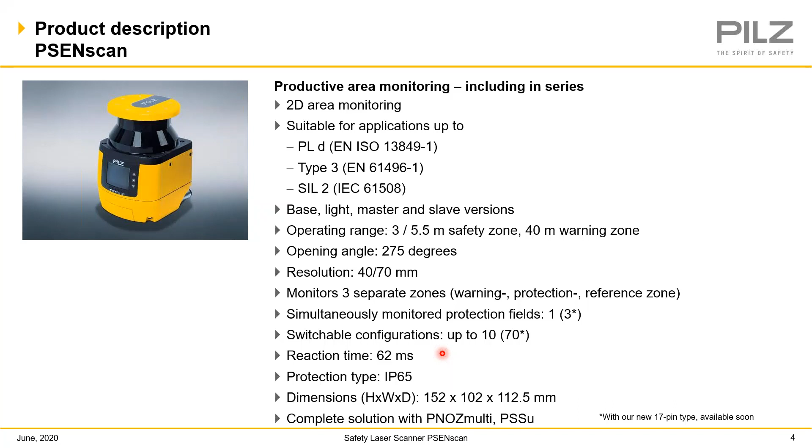Currently, we can do 10 different zone configurations with our scanners. But again, with the new version, you'll have up to 70 different zone configurations possible. The reaction time of the PSENscan is as low as 62 milliseconds, and it has an IP rating of 65 for your protection.

Some additional features with the PSENscan with the light version or the master-slave version are the muting capabilities, EDM, which is the external device monitoring. There is an override function. There's also the capability of doing reference point monitoring, and you can also use these scanners in vertical applications.

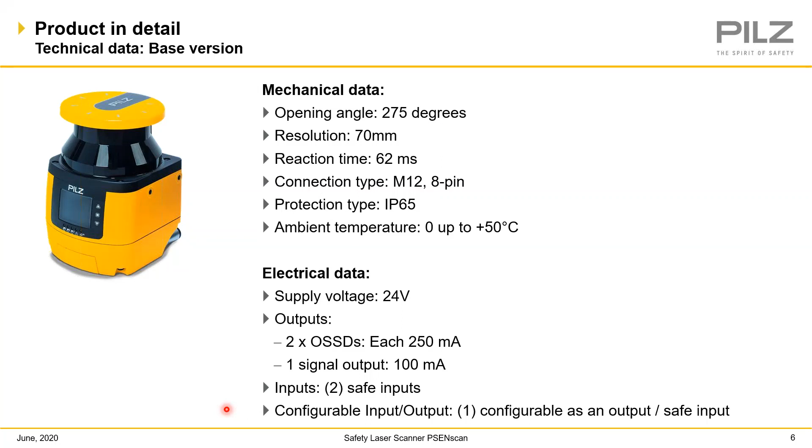They all come with a 12-pin or an 8-pin connection on the back side of them. You do not have to use both of them. It's just simply one or the other. And the only difference is it depends on how many inputs and outputs that you need for your configuration. So if you don't need very many, you can use a lower cost cabling and go with an 8-pin version. As you see in parentheses, with the new version coming out, it will be a 17-pin connection.

All of these, again, are 24 volts, and the inputs and outputs all depend on the number of cables that you have, depending on which pin configuration you choose. Each one of these scanners has a removable memory module. The memory module is used to save your configuration on your scanner.

If something happens to one of your scanners, happens to become damaged, you can simply take the bottom plate off of the scanner, unplug the memory module, and plug it into a new device. You do not even have to take the cabling off the memory module, because this is where your 8-pin or 12-pin connections will be. You do not have to remove the cabling. You do not have to have any sort of computer or software. So all you simply do is plug in the memory module, and when you start up, it does a self-test, and your scanner is good to go.

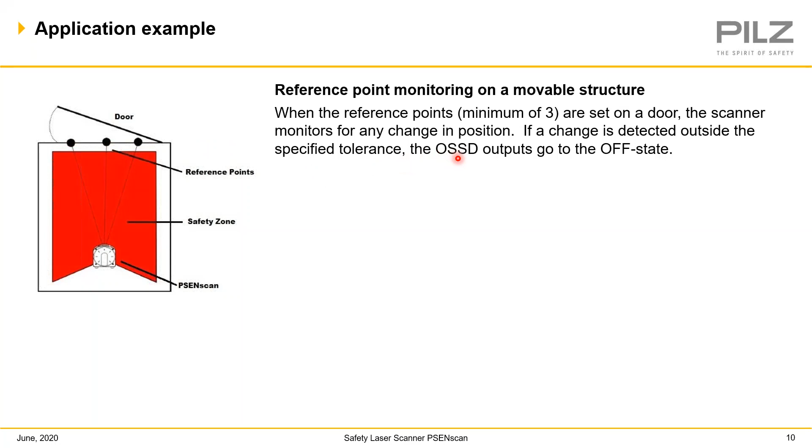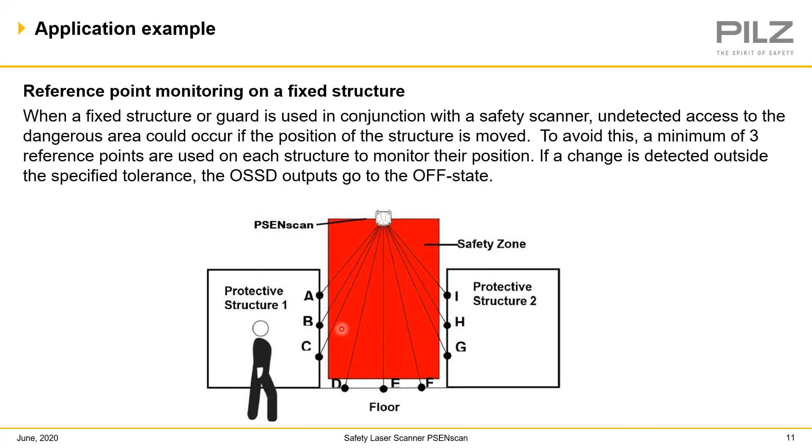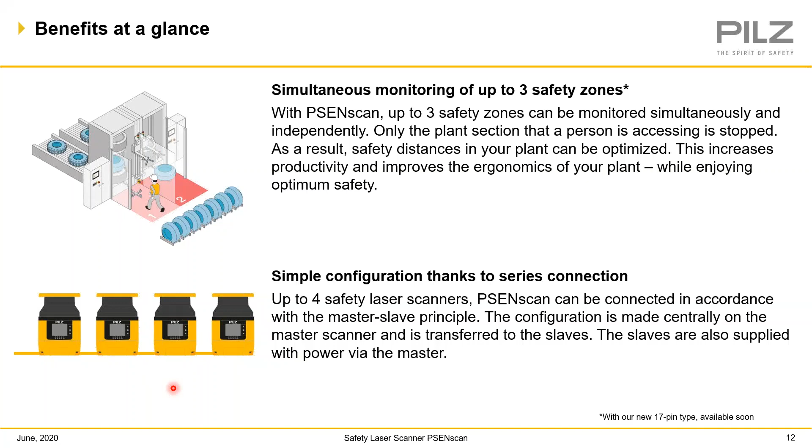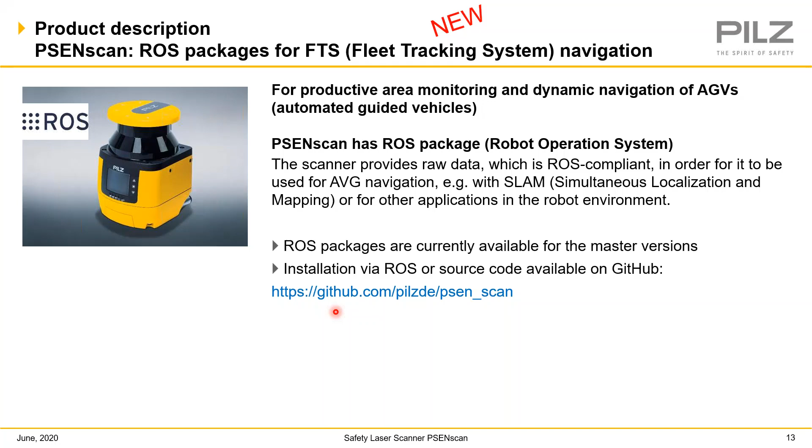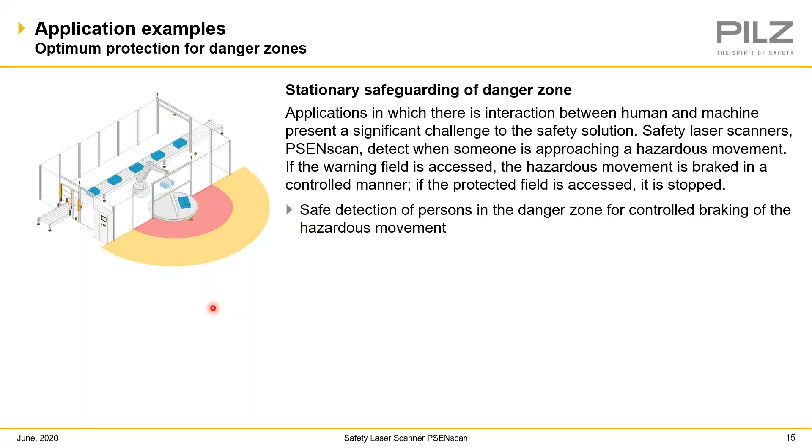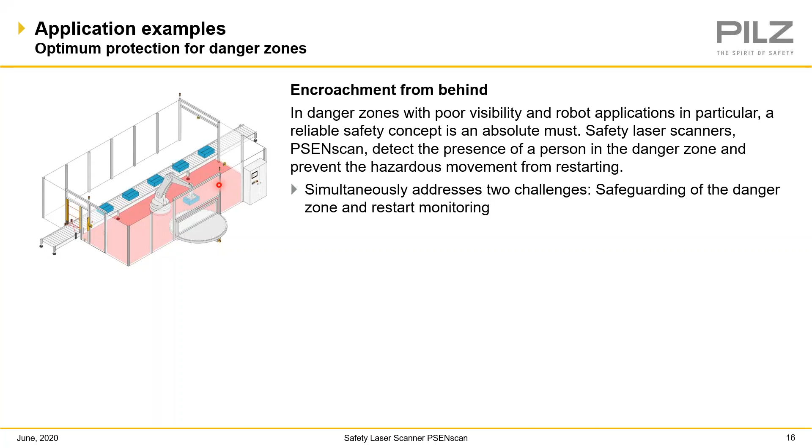This here is the exact same work cell. However, instead of monitoring the outside, they're showing you how you can monitor the inside. So this will be used if someone would happen to be inside the robotic cell, and maybe somebody would walk up from the outside, not notice the person inside the cell. They try to start the robot cell, and that could be very hazardous. With the laser scanners on the inside of the cell, that would protect you from restarting this machine because it would detect someone inside.

This is an example of using the laser scanner in a vertical application utilizing muting. As you see here, this is a walkway. One employee can walk through here, but also a conveyor belt for product to come through. The laser scanner is mounted in a vertical application, scanning this whole area, allowing access for the individual containers to come through, again, utilizing the muting function, but limiting the operator to go through. And if they do, again, you would shut down similar to what you would with a light curtain.

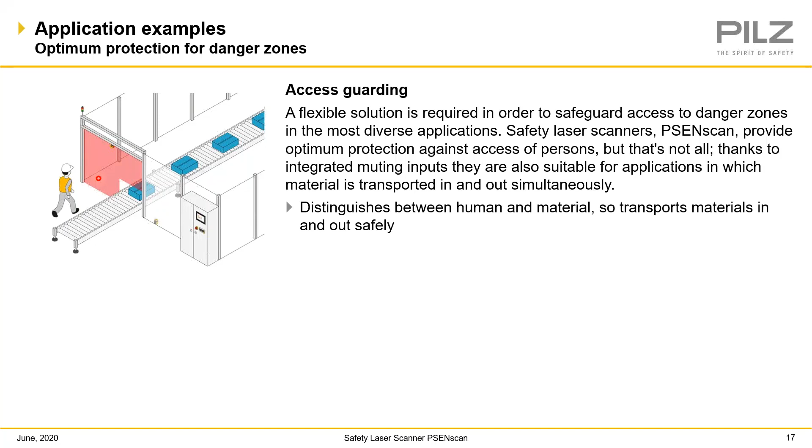We've talked about this already, but again, this is an application where you can use the laser scanners on an AGV, again, utilizing the ROS packaging. And again, you can use it with lots of different devices, lots of different applications. Again, here they're talking about using it with the SLAM algorithm. SLAM will help you with mapping your environment and being able to avoid any type of collision with your AGVs.

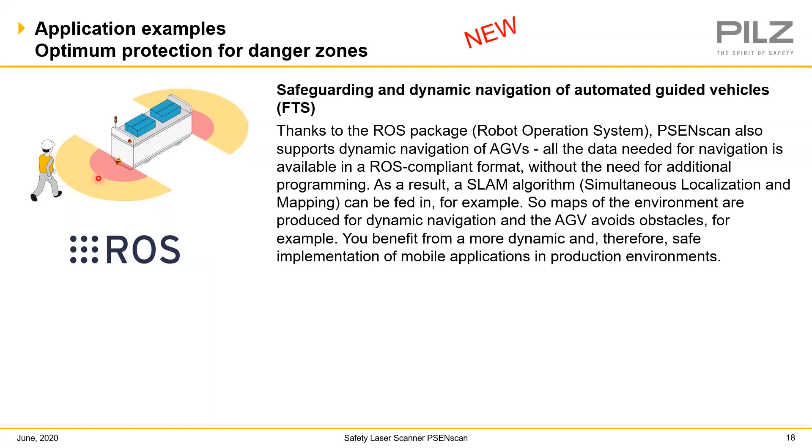These are just a few more AGV examples. With a Pilz safety scanner, you have 275 degrees of protection. So as you see in this AGV application, you're only using 2 safety scanners. So with a 275 degree protection, one safety scanner can do 2 sides, and the other one on the opposite corner can do the other 2 sides. Again, cutting down the cost of the number of scanners that you have to use for one application.

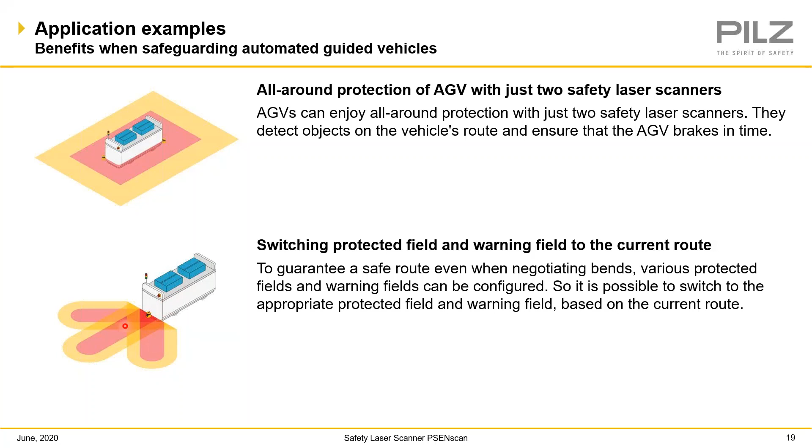This application here is utilizing the zone switching. So if the AGV is moving forward, you can have it set for zone 1. So maybe you're just looking straight forward. But if you happen to turn to the left or right, you can change your zone configuration to be at an angle so you can detect off to the side to make sure that there's not going to be any collision versus just checking the front.

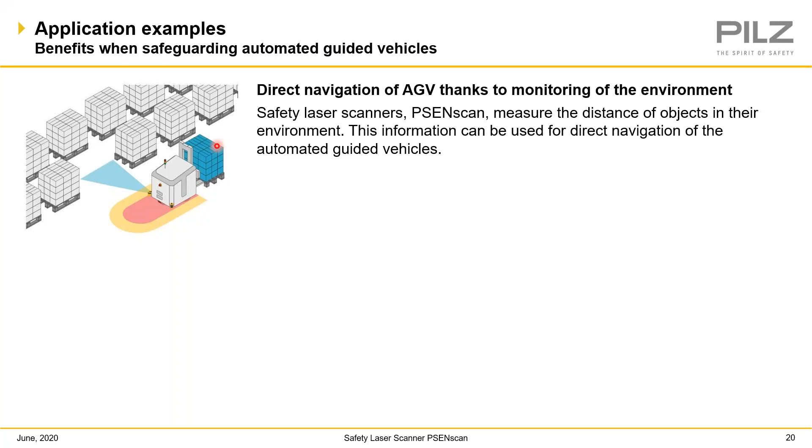And another AGV application here with the PSENscan: it does provide all the raw data, but you can also use that data for distance measuring. So here the PSENscan is actually going through and trying to find an open space to put this container. So utilizing the raw data from that scanner in your ROS environment, it's actually measuring the distance and finding an open spot and allowing you to use that for your cargo here.

This is just a simple breakdown of the part number configuration. As you can see, we have several different versions. The ME will be the new master encoder version, which will be the 17-pin version that will be coming out later this year.

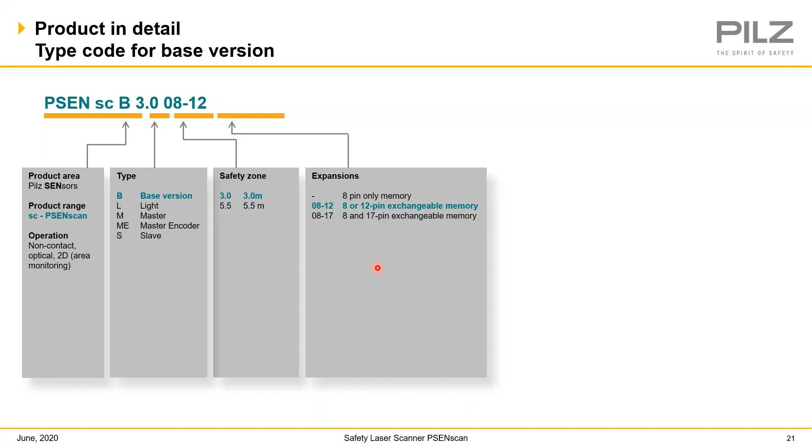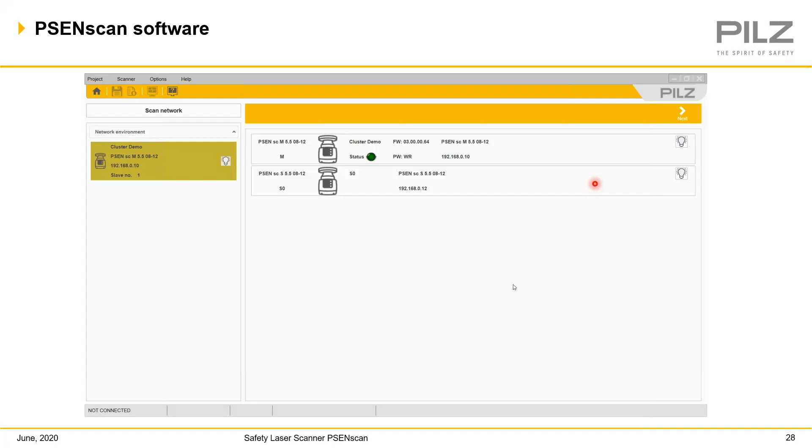Again, if you're back to the main screen and you want to create a brand new configuration, just simply click on that. That will open up a window that has all the available products to date. You do not have to have different software. The base version has a different software, but the master slave version and the light version all utilize this same software here. You can simply select which version you want, and that'll take you to the general properties.

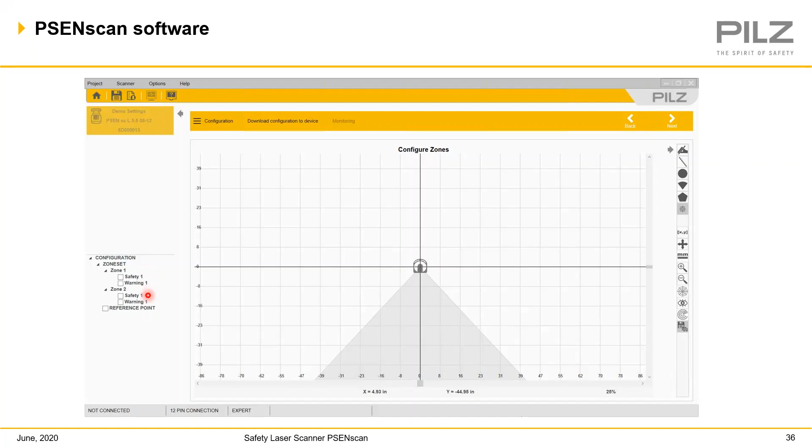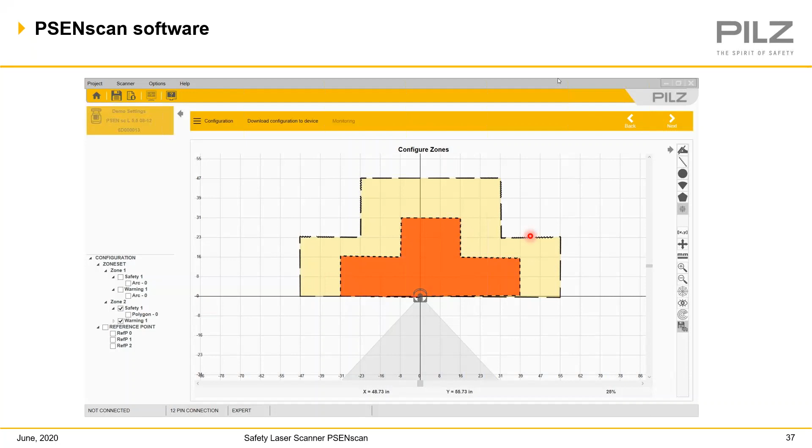Over here in the far left-hand side, you can see your configuration. So since I have chosen to do 2 zones, it allows me to have 2 zones here that I can draw in independently of each other. So here I selected zone 2. I can simply come in here and I can draw in my safety zone and my yellow warning zone. If I come over here and I switch to zone number 1, I can have a completely different configuration by looking at that zone. Again, I have a red safety zone and a yellow warning zone.

The final thing that you have here is your reference points, which I mentioned earlier. The reference points, you simply select your reference point indicator, and then you see the green dot located up here. That is your actual reference point of what you're using as a structure, the door or the wall, the fence. And with here, you can actually select the tolerance, and what is the tolerance of the vibration you're going to allow that to move before it trips.

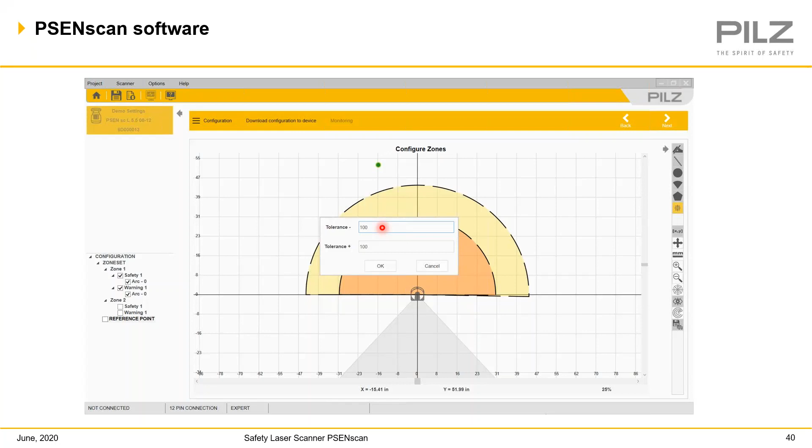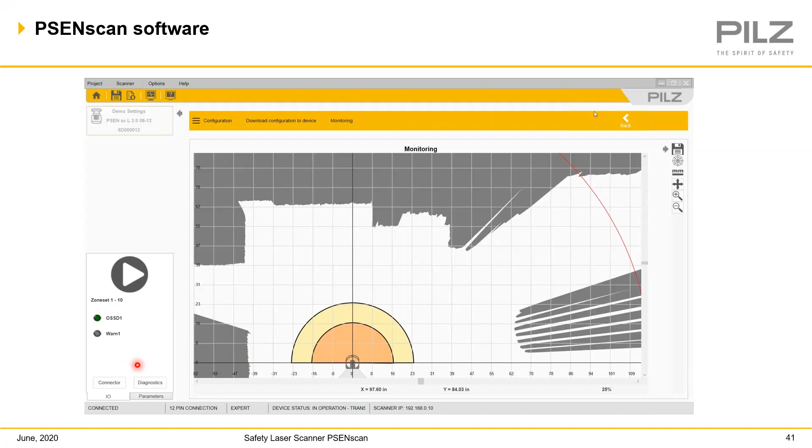Once you save your configuration and download it to your scanner, you're actually going to go into a live monitoring mode, as you see here. You have your simple scanner configuration down at the bottom, and anything that is gray is a wall or a structure. If I come down here to the bottom left, I can actually select my diagnostics indicator, and this window will pop up and now allows me to look at every single input and output I have on that scanner, and it also shows me the status. So whether area switch 1 is on, my OSSD outputs are on or off.

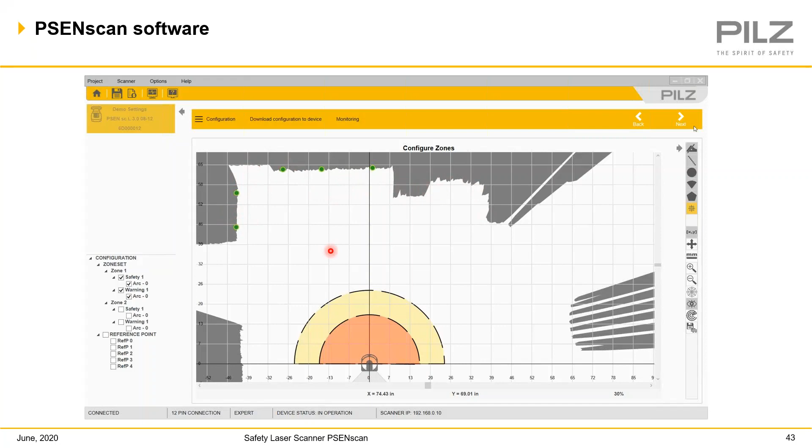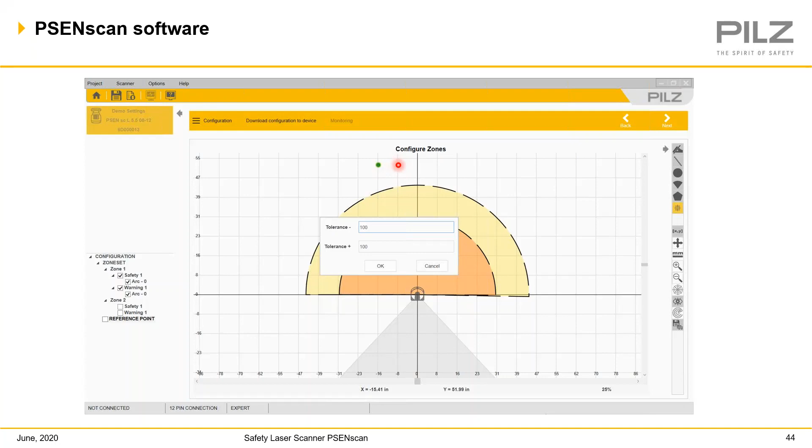It also allows you, if you're in the zone monitoring, to click on the back arrow and come back to the zone configuration screen. So since I'm live and I backed up to the zone configuration screen, now I can see my walls or my door that I'm looking at. This is great for when you're using the actual reference point monitoring, because as you saw on my first screen here, it's kind of hard with a blank screen to know exactly what that reference point is going to be, especially within that 100 millimeter tolerance.

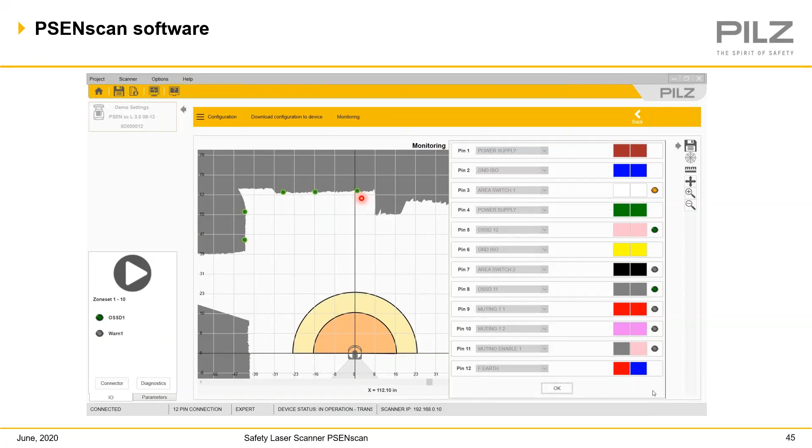So if I'm on my configuration screen here live, I can definitely pinpoint where those reference markers need to be and where the wall is located. So once I configure that, I can save it again and then definitely be within my tolerance. So here it's showing you that I actually have 3 reference points again on the door. If the door would happen to open, as you can see, it's no longer there. The reference points are no longer tied to it.

You're going to get a big message right here on the software that says reference point. That's going to be the same message that's going to be on the front screen of your scanner. But you also notice that the OSSD output here is red and it turned off. You can also notice that here on the side where you're looking at your I/O. The reference point is no longer there, so both OSSD outputs are turned off.

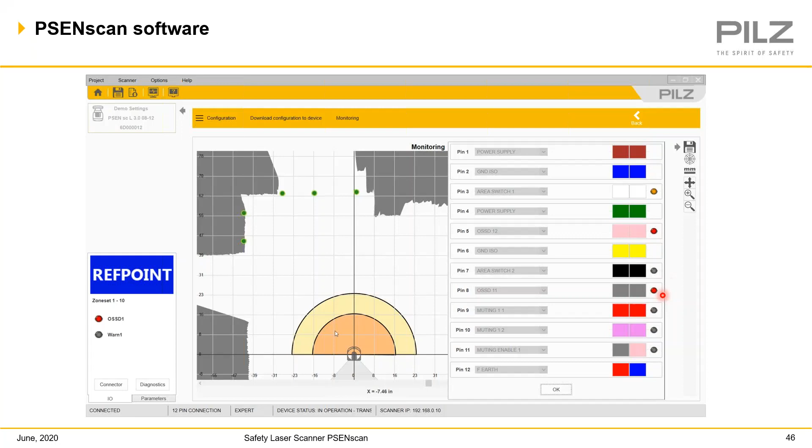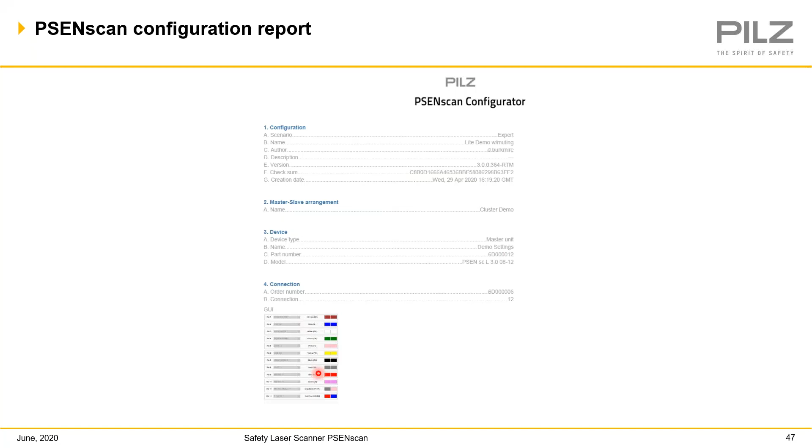The last thing I wanted to show you real quick is the reporting that you can do. This is just a sample of the PSENscan configurator reports. Again, very similar to a lot of software. It has your username, the checksum, creation date, but it also gives you your I/O pinout and how you have that configured, as well as giving you a sample of what your zone configurations are set up as. So it's definitely a great tool to have. You print that out, stick it inside the control panel for any maintenance personnel to look at.